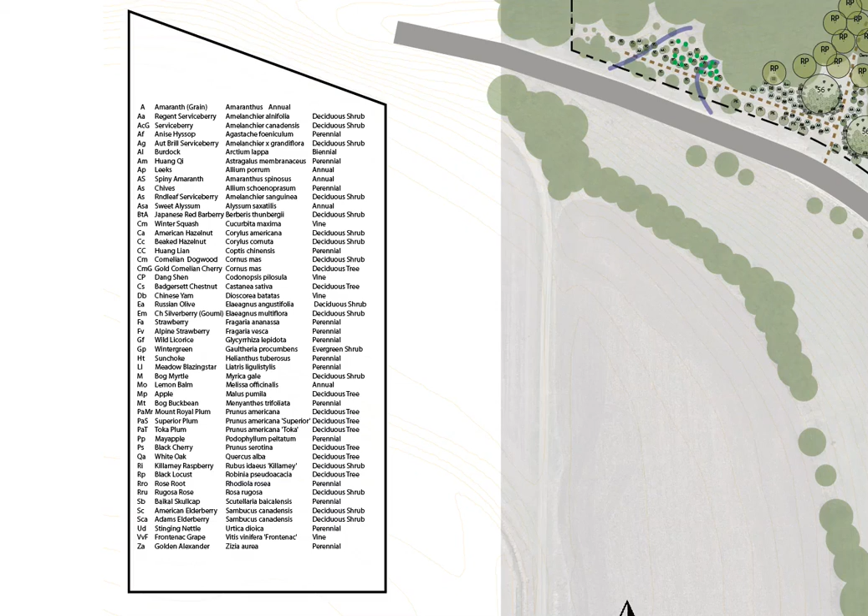So in the process of doing our design work, I'm always trying to figure out a way to streamline our process and really take out, first of all, the visual noise in our designs, make them simple, but also communicate as much information as possible with the least amount of components and elements in the design. And we've been fairly successful doing that.

We're also trying to save time. We're trying to really get rid of the repetitive tasks that are required. And a lot of it has to do with old school way of doing things, not thinking things through. And there's been a number of times over the years that we've all of a sudden realized, why are we doing this, or why are we limiting ourselves this way when really we don't have to.

And I want to show you a couple different things that we're doing. This is the latest one. On the left, what you're seeing is the plant list for a design. And this is a little box up in the top. It'll say plant list. And as you can see, we don't have numbers next to the plants. We have initials. And those initials next to the plant are actually the initials of the scientific name.

And really, it's like, why do we need to have numbers? And then you spend all sorts of time putting the numbers in, and then you'll add a plant, and you're trying to keep things organized, and it's really a lot of work. Whereas if we just always use the initials that we devised from the scientific name, our plant symbols, which you can see on the right, will already have that.

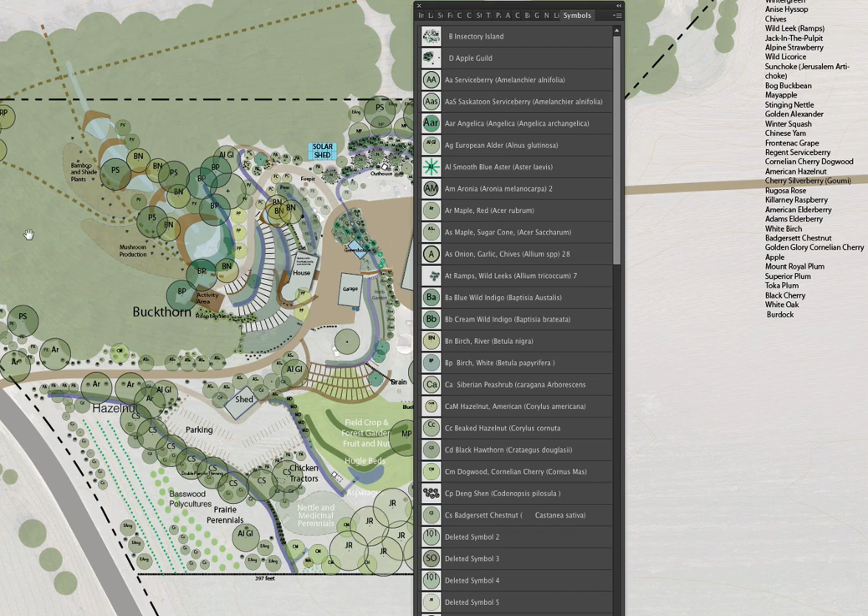And then when our client is looking at the design, and they see the initials BN or PS or whatever that might be, they can actually go over to the plant list, and they can see what that initial stands for and what it is in here. And we're still working on this. Some of these in our symbols aren't on this list, and some things on this list aren't in there because this is a work in progress right now.

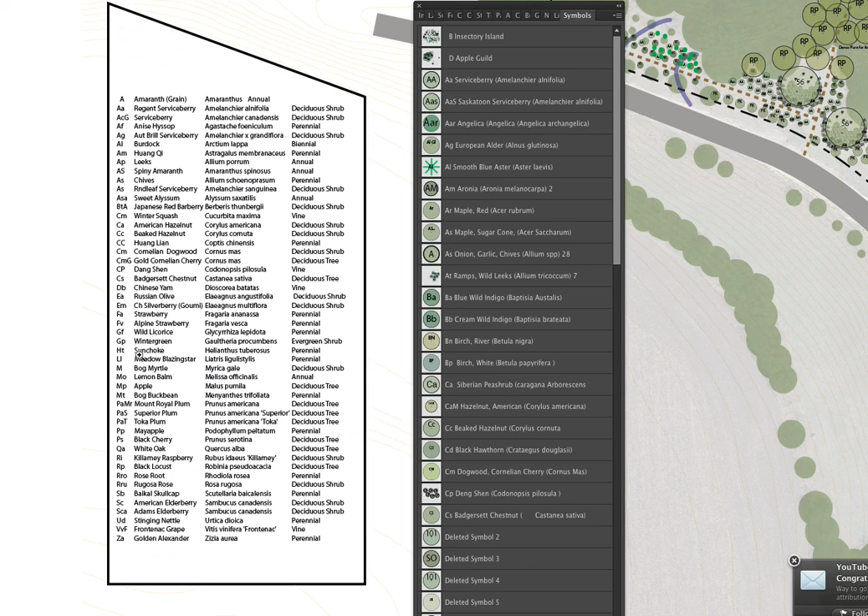But that's our new strategy, is to not keep numbering these, leave the initials on the plant symbols as much as possible. Mute them back, as I've shown in some of the other videos. Our text and our fonts are very thin lined. We want to keep things really at a minimum graphically, so it's easily read.

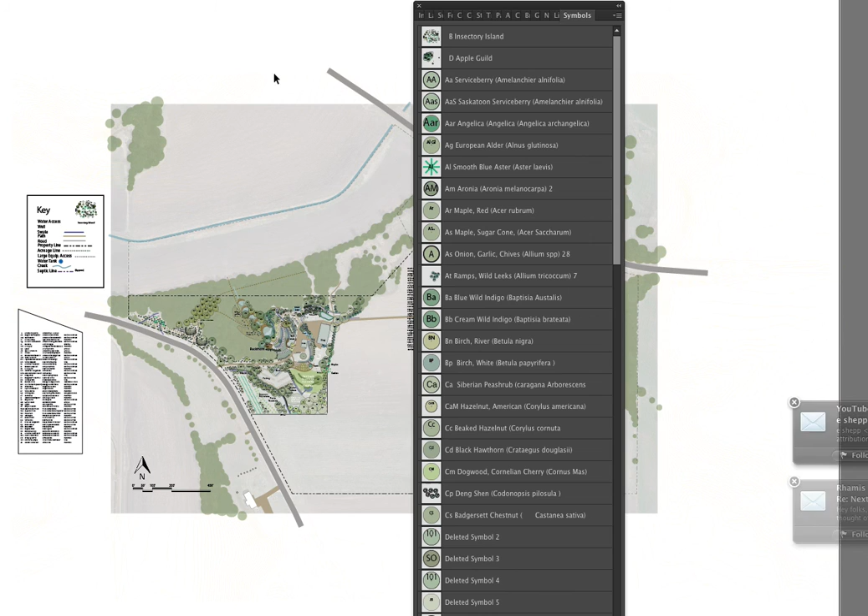Now another part to look at here that I want to show you is the fact that every design that we work on is in 20 scale. 1 inch equals 20 feet. And it doesn't matter if we're doing 10 acres, 25 acres, or 160 acres.

In Illustrator, we can always be working at 20 scale because it's a huge file. We could never print it out. Sometimes it'll be 6 feet across. I mean, you're working on something that's 160 acres, and 1 inch equals 20 feet. It's a pretty huge file. But it really doesn't matter because we're going to resize that later.

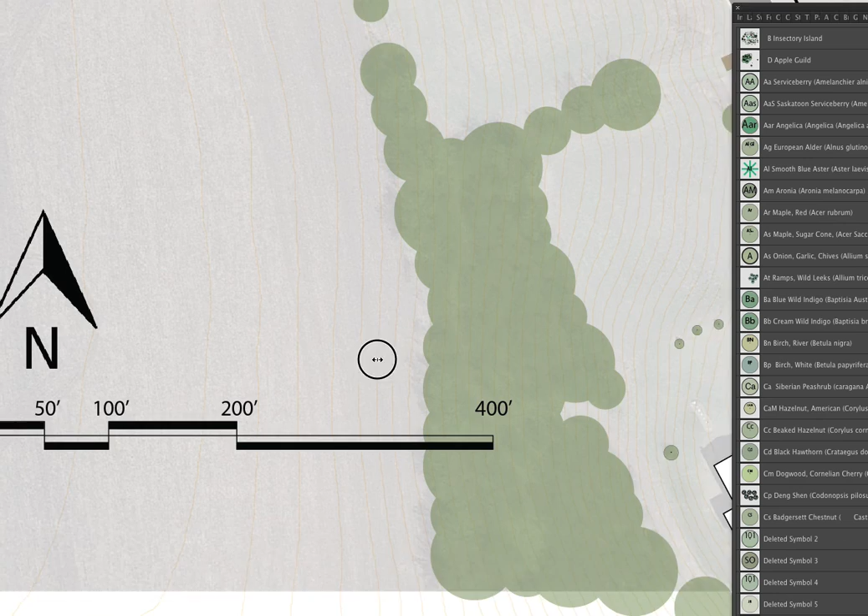So our working file, like in this case, is 20:1. We still have our bar down here, which shows the scale that this is, and this is what we use when we bring it into our title block. But suffice it to say that everything we do is in 20 scale, which means all of our symbols are in 20 scale, and we don't have to resize anything when we work. We just always work in 20 scale in Adobe Illustrator.

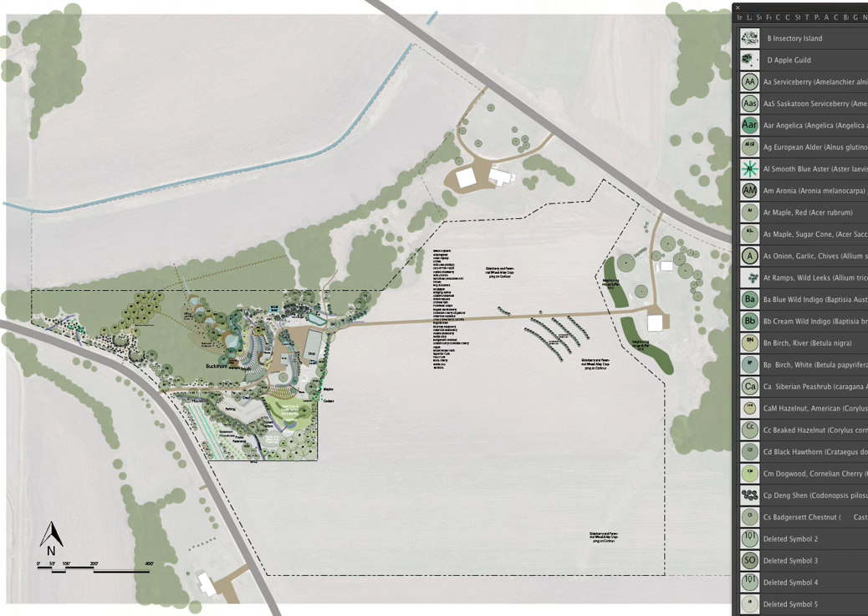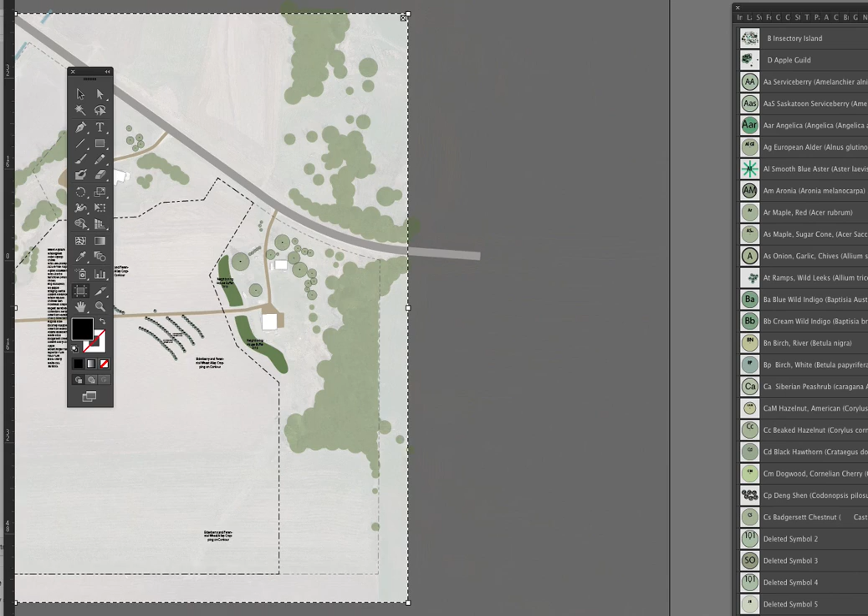And then what we do is we bring this into another file. So one of the tools that's in Illustrator are artboards. That's these here. And the artboards are really helpful because they show, let's see if I can get it to show here. It keeps jumping around. I'll try and get this to move up a little bit. Here we go. It won't stay up there. Let me try and resize this for you a little bit. Make it a smaller window. Get those artboards to show up.

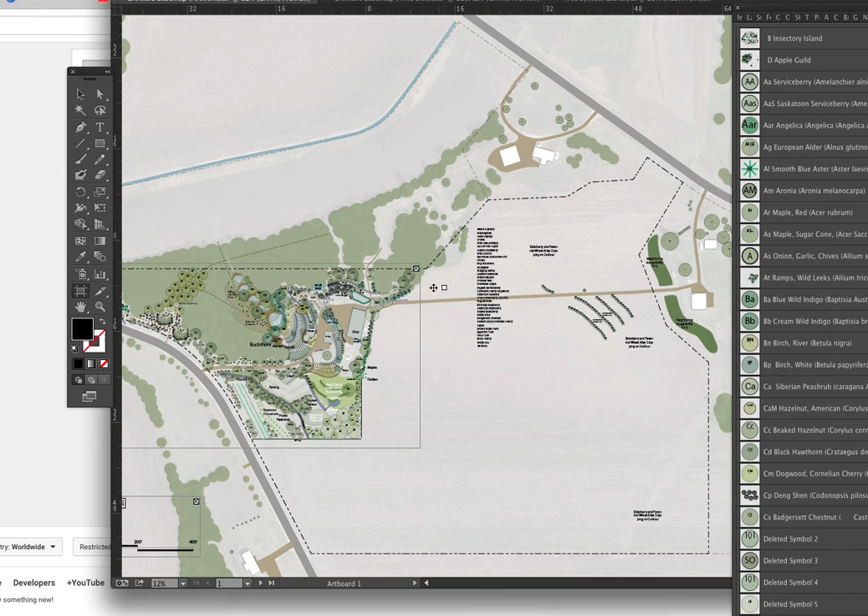Okay. So we have our artboards selected in here. And I think on this one we only have one because this is our regular file. This is the whole acreage that we're working on. And look at what we have here though, is that there's one artboard on the outside and one artboard really for the zone 1 and 2 area on the design. And so we can go back and forth between these. There's an artboard there, there's zone 3, artboard 3, artboard 2, and artboard 1, which has the entire design in it. This again, remember, is in 20 scale.

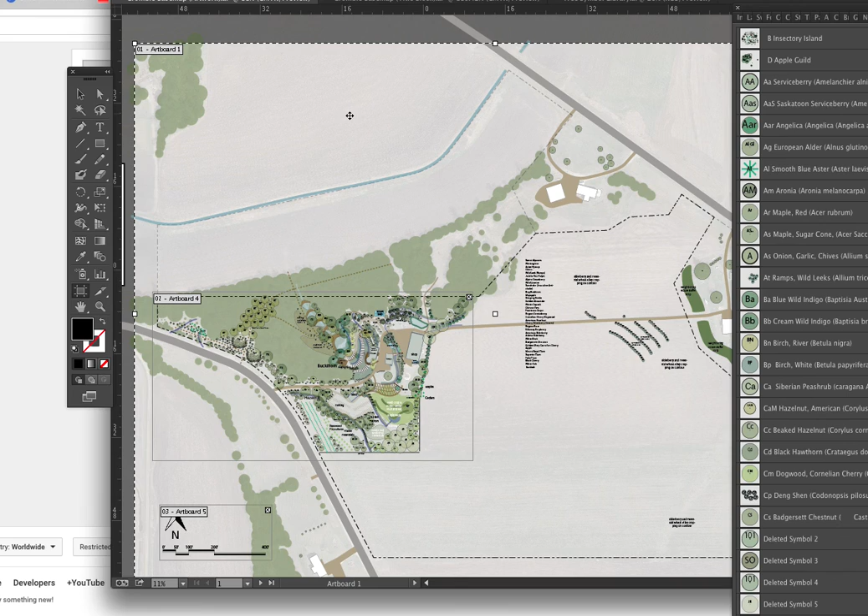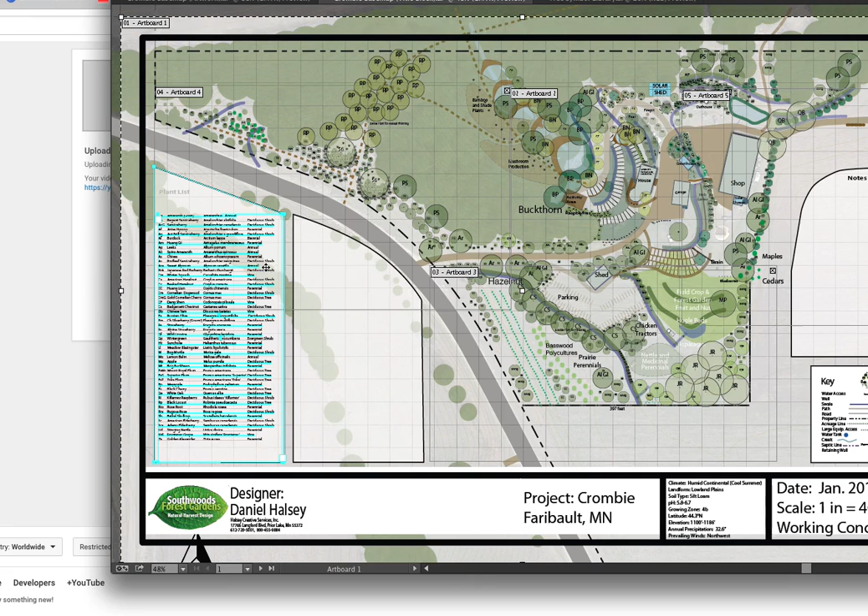Now once we do our design work on this, and this is our artwork, we call this our artwork board. This is the artwork file. We then place this file into a title block, and you can see these artboards are popping in here again, right? The title block itself is at a scale that we decide. So all of the artwork that you're seeing here, you can't even edit it. The only thing you can edit is the final plant list. All of this comes from the other file, and what we've done is that we've resized the artwork that we were working on and placed it.

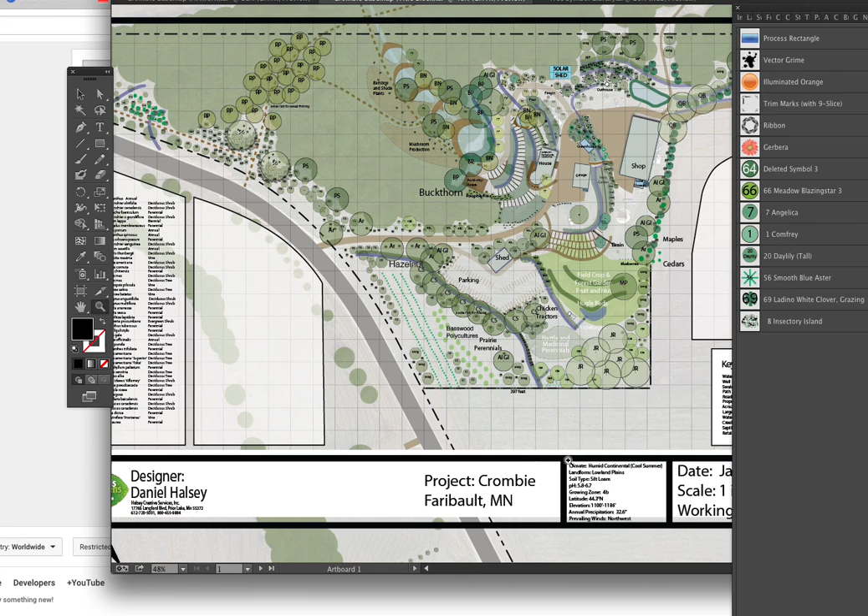Well, first of all, we placed it into this title block, and you can see it has our name on it and the client's name, where it's at. All of our data is on here for site conditions. We're always adding to that. It gets smaller and smaller type and more information on that. Right? We have all of our note blocks and things. Again, it's a work in progress. So you can see all this information. So we come back and we size this later.

And now you can see outside of our board, outside of our printed area, is this little chart. And we measure this and decide what our scale is going to be. So it's really not that difficult. And so I can take my measuring tool, basically the measuring stick, the ruler, and look up here and look at that. It's 400 feet is about 10 inches across, and I got a little off on that. Well, it's 40 to 1. Great. 40 to 1 is now our scale for this presentation.

That's all we have to care about, because we're always working at 20 to 1 on the regular artwork, but in the title block it appears at 40 to 1, or it could be 50 to 1, or it could be 200 to 1. We don't really care.

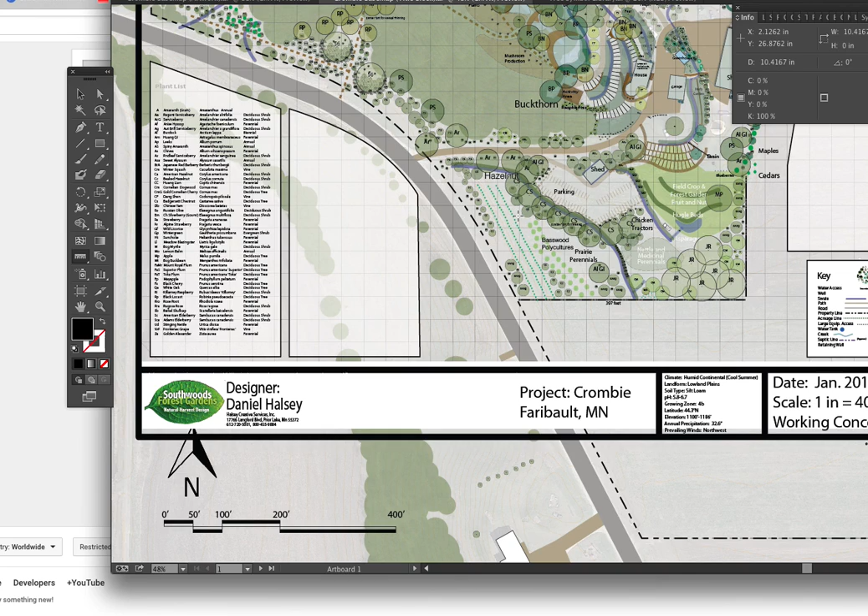All we want to do is make sure that the design fits in this 24 by 36 inch space. By the way, sometimes we work in 36 by 36 and we make a very large square file. The standard size, because most things are horizontal or maybe sometimes vertical, we use a 24 by 36 format because that's the standard format for most landscape engineering design paper.

But if we want it larger, we'll go up to 36 square, and that's about as big as we really want to get, because after that output gets really difficult and laminating gets expensive. So 24 by 36 is our standard size, 36 by 36 if we need it, but that's just the title block. And that's for our presentation.

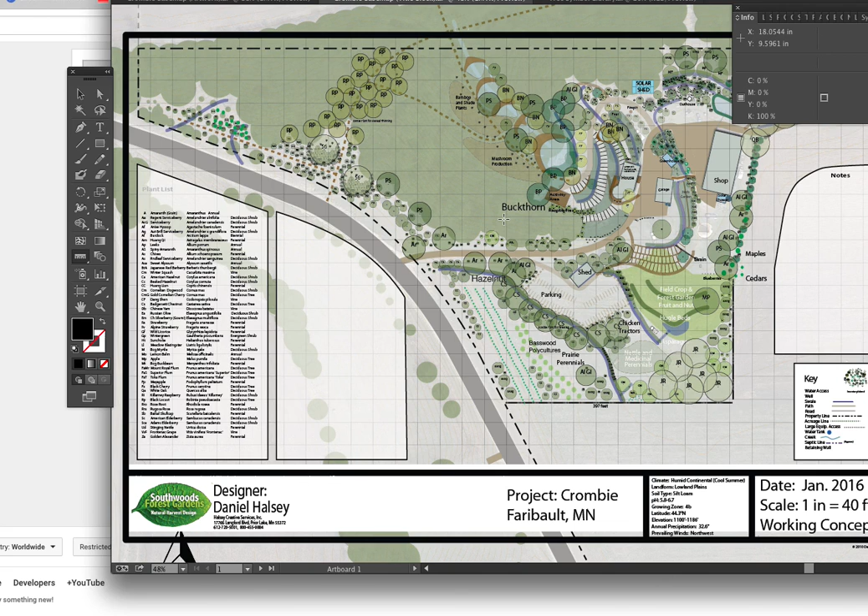We place the other artwork, I should say. We place the artwork file in this, we resize it, and then we go down to the little ruler, and then we just decide, okay, what's our magnification going to be in here so that this file can be used.

Now, if we go into the links on this, here we go. Oops, lost that. And I link on this file, I think it's the top one, it'll actually tell me that we've scaled down our 20 to 1 artwork 52% to make it fit at 40 to 1. Works good. Actually 50, 52, somewhere in there, there's some scaling differences. It tells us a lot of other information on here also. But that is what it's giving us for information, to what size we actually scaled this down to.

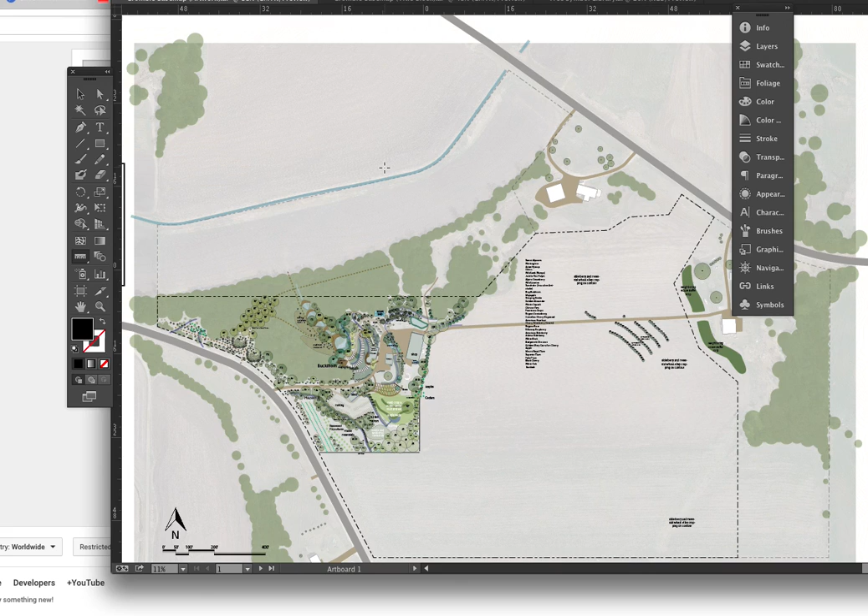So the process is, and this has really made our life a lot easier, we have one file that is 20 to 1, and that's our standard scale for all of our work. All of our plant symbols are at 20 to 1. All of our swales, all of our key information, things that we have in our key, these are also scaled at 20, although most of the time it doesn't matter, but at least we have our standard look for the swales, the paths, the roads, our property lines, things like that. It just makes it easier because it's all ready to go.

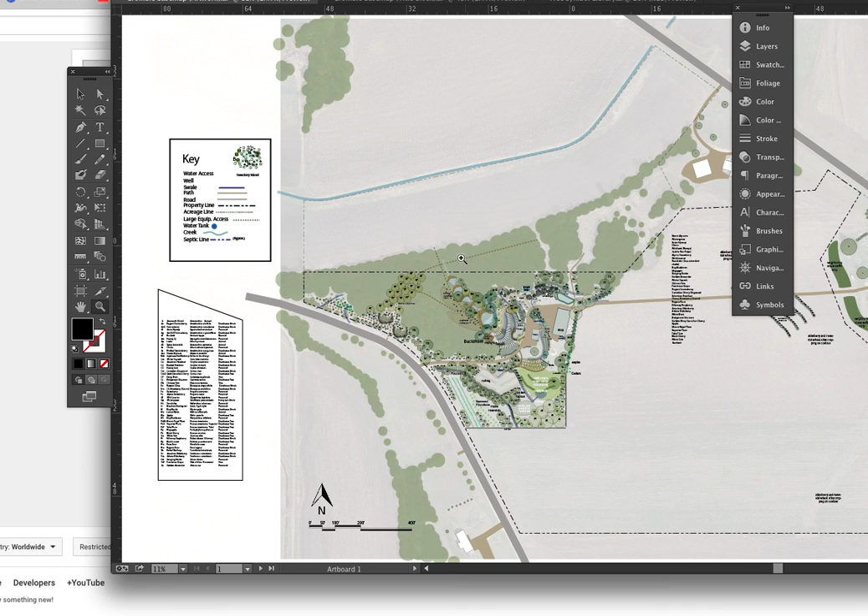We have a little insectary island up here as an example. This file is 20 to 1. We do all of our design work on this. All of our layers of all of our information is in here. See if I can bring that down. Here we go. All of our layers, all of our base map, all of our concepts and things that we're working on are all in the artwork layer.

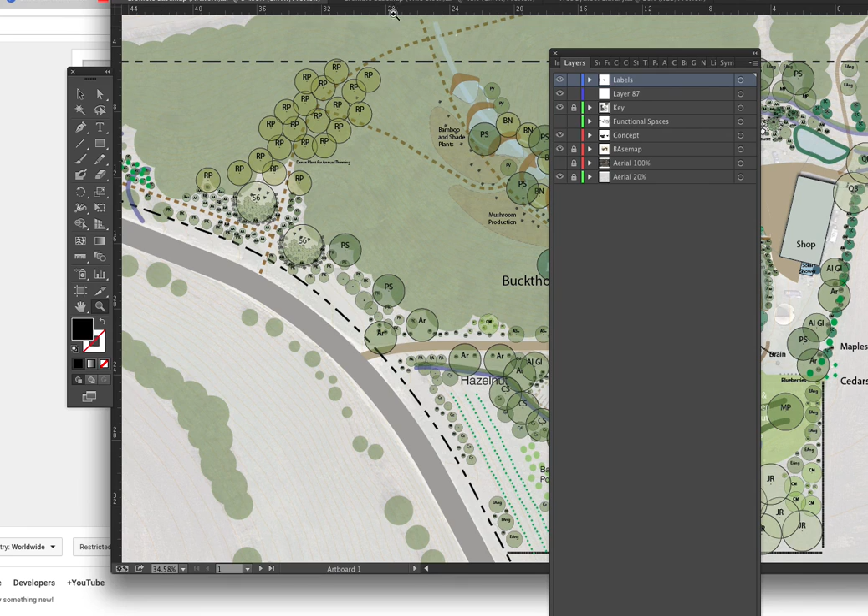That is totally separate. And then we place this artwork into the title block, and then we add our lists, and then we add our notes, and we add the other things that we need on our title block. So those are two separate files that we're working with. This really makes it easy. So you have your plant list, you have your symbol library at 20 scale, and you keep building that.

You have your artwork, your concepting file that you're working on. That's at 20 to 1, and then you place that artwork in your title block, whatever size it is, and you decide yourself what that scale is going to be that's reasonable within any 10 feet either way. 20 scale, 30 scale, 40, 50 scale, 200 scale, depending. And then you decide what it is, and now you have decent presentation, and you didn't have to rescale everything to make it work.

So that's kind of our process, and this is kind of that whole package that we're trying to figure out, a process so that it's easy to work, it's reusable, we don't have to keep doing things over and over. We have a standardized process for doing our design work with permaculture, ecological design, homestead design, whatever it is. We want to make sure that all these tools are standardized so we can work quickly and spend our energy on strategy and being creative problem solvers.